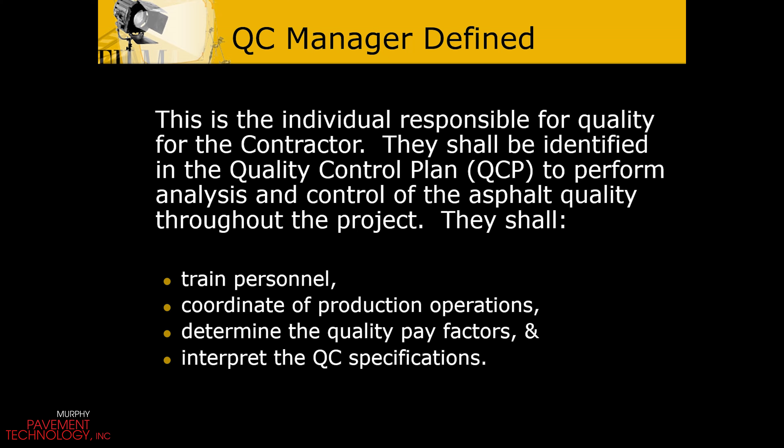They're typically going to be determining pay factors on a project after they get test results, and they'll be coordinating those pay factors with the agency they're working for. And they're always both interpreting quality control specifications as well as helping industry and agencies develop future quality control specifications to help improve asphalt pavements.

Quality pay factors are a reflection of consistency and accuracy. A contractor can produce product with a very narrow range of test results, but if they don't target the correct location, they could fall off and in some cases be below the lower limit or above the upper limit of pay factors. So paying attention to the target—I'll call it a job mix formula, or a contractor's job mix formula—and then the consistency towards that target throughout the sublots.

And then you end up with typically a lot pay factor, and the number of sublots and whatnot that go into a lot vary from state to state, but they're significant. They could be as low as 4 and typically as high as 10 sublots for each lot of material.

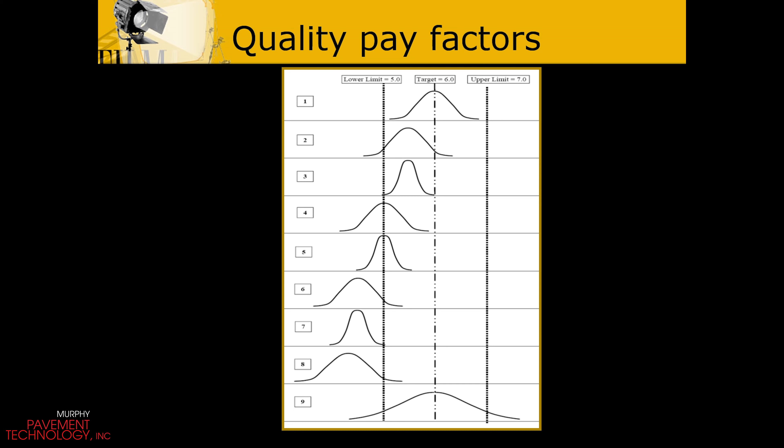So you can see here, this is really not consistent from test 1 through test 9. This is also a graphic that shows you how maybe 9 different contractors actually perform under a quality control or pay within limit specification. So again, typically we want to have a very narrow range of results, and we want to make sure the target is as close to the middle as possible.

Quality control manager's must-do list is always evolving. Planning and communicating are very important. Organizing personnel—what time they should show up, and what activities they should be performing throughout the project.

The quality control manager needs to be intimately involved in input products so that they can anticipate adjustments. We call that controlling the process, and making minor proportioning changes as needed. They need to lead by example. And similar to before, the quality control manager needs to learn how to command respect, not demand respect.

Staffing challenges do exist, especially in the summertime when we have day and night work. So the quality control manager needs to staff accordingly, whether it's with employees from the asphalt producer or by reaching out to local consultants that have the talent pool to supplement on an as-needed basis.

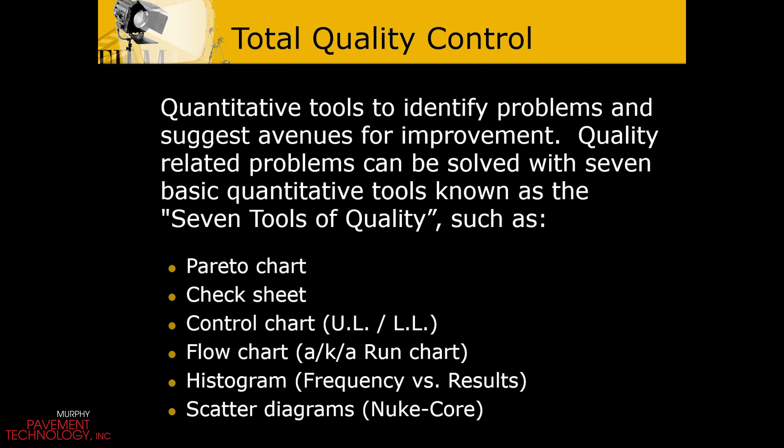One of the tools a QC manager can use, and actually any manufacturing facility can use, is a Pareto chart, named after an Italian economist many years ago, that demonstrates from left to right the amount of defects. The taller the bar graph, the more the defects, ramping all the way down to the least amount of defects, but the sum is going to be 100. In this particular case, you can see—this is just an example.

Lack of action when variability exists is a very common problem in the manufacturing of products. Aggregate variability in some sources can be incredibly high, testing error—whether it's on the contractor side or the agency side—still, unfortunately, a very large portion of our defects in asphalt come from testing variability.

What's going on at the asphalt plant? Is it properly lined out, calibrated, and whatnot? And certainly misinterpretation of specifications can also do it. So the red line that forms essentially runs up to 100% defects. So if you had 100 defects and you summed each of these individually, that's how it works out.

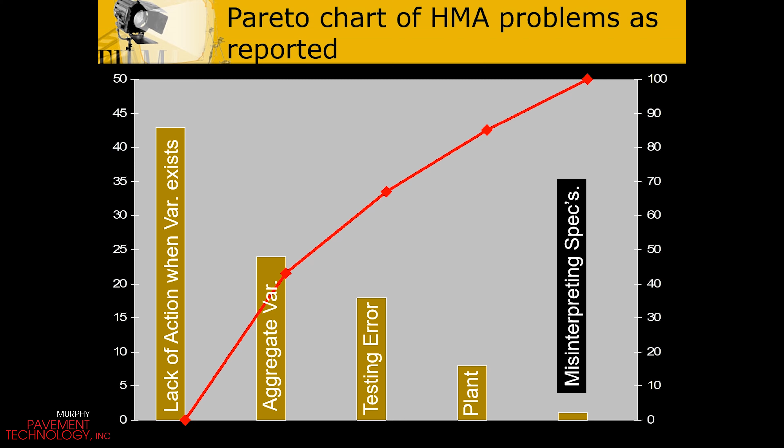And then you need to decide which ones need to be addressed first. Why does lack of action occur so much? What are the ramifications, the penalties, and whatnot? It's a very good tool to use to be successful against a Pareto chart.

The simplest form of getting data into a Pareto chart is a quality control checklist. It could be somewhere on an interstate, and various problems come up. You need to pay attention to how often they occur, and then tag it with who you need to talk to in order to resolve these issues—maybe a foreman, a superintendent, or a plant operator.

Why do we have certain problems? Is it a design issue, gradation breakdown? Is your plant properly set up to do positive dust control? Did you do a mix design that properly anticipated how much dust would be in the mix? Segregation has been a topic I've trained on my entire career, and unfortunately I continue to do so, as it keeps rearing its ugly head for various reasons we'll talk about later.

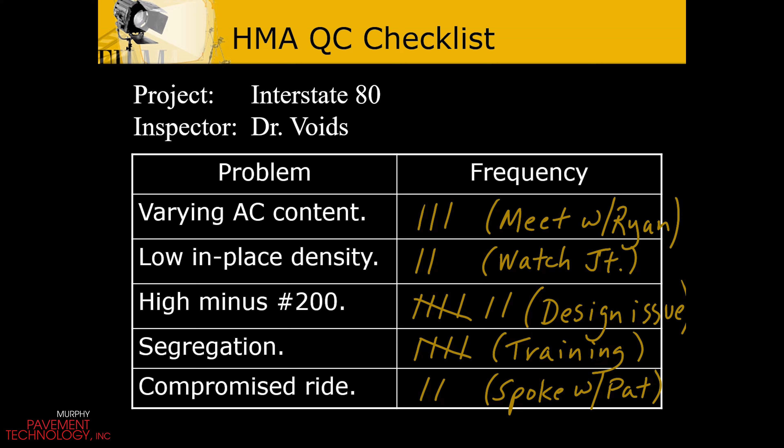And a compromised ride—was the paver properly set up? Did the superintendent set the job up correctly and use two skis when required, or did they elect to use a joint matcher, which causes nothing but problems on a project? We talked about that in the last module. I just want to continue repeating some of the things that remain problems in our industry, so please pay attention to those.

Quality defined from Japan—different individuals came up with commentary on quality, and which one applies to you and what makes you feel that quality. Yeah, that really sounds like why I think quality is important.

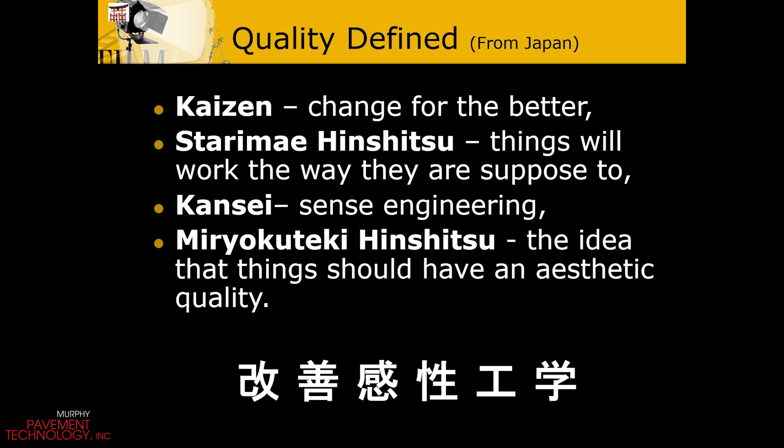The aesthetics could be an issue. It certainly is in commercial parking lots—that's a major part of the quality measure they have. They don't know what asphalt is, and they certainly don't know what gradation is, but they can definitely look and see if your joints don't match and if the texture of the asphalt is smooth or not.

Another quality definition, from TRB Circular 457, which I think is really good, is the degree or grade of excellence of a product—and is the customer satisfied, yes or no, and to what degree? If they're really happy, we call that an A+, and you're going to get paid the maximum amount, which might be 105% in a pay factor.

And then there's the degree to which a product conforms with a requirement—requirements for oil content, strength, voids in the mineral aggregate, Hamburg testing, crack testing. It could be the prettiest, smoothest ride ever and have great density, but if it doesn't have the right ingredients, there might be a penalty. There's an awful lot that goes into this, so I applaud the TRB for putting this definition of quality out there for all of us to follow.

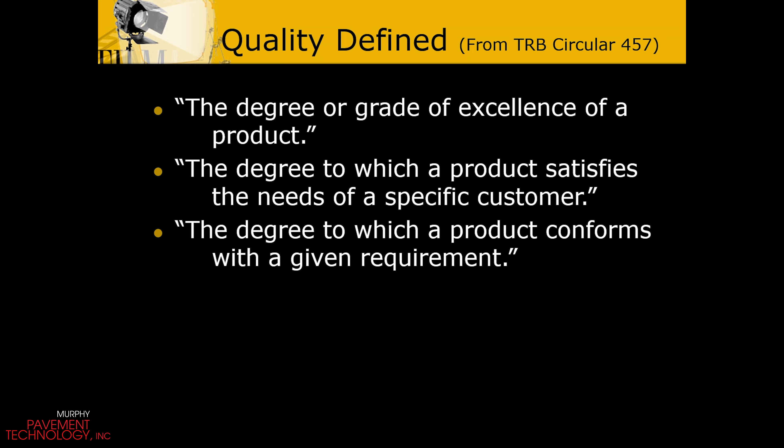I hope you adopt it. I hope you adopt the quality requirements we talked about. Then your job gets even more difficult, because it isn't just one asphalt coming out of a plant—we have transition mixes. That means we might be making asphalt for a local agency, then flop over to an interstate, then back to a commercial job, and vendors come in to pick up asphalt. This is very challenging. Transition mix is probably one of the largest reasons we have failing test results in asphalt, due to a lack of the plant operator paying very close attention to the transition from mix 1 to mix 2.

Probably, again, the number one reason for failure in test results is transition mix.

We have a lot of different asphalts around the world. We could have very low ADTs or very high ADTs—average daily traffic counts. We're going to have a lot of different asphalt mixtures for each type. There might be a big stone or a little stone, a coarse gradation or a fine gradation. Could be a dense graded asphalt, could be a stone matrix asphalt. Lots of different characteristics are required because asphalt is so phenomenally flexible and can be used in so many applications, but you need to make sure you use the right mixture in the right application for success.

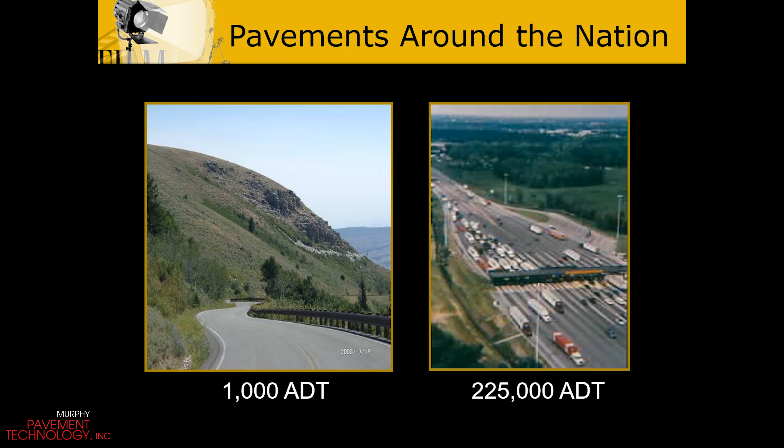We wouldn't want to put a low volume shoulder mix on a mainline truck route in the middle of a city.

So it was a triple whammy in this particular case. It only flushed in one direction because of those two things—that was the day they paved with ingredients a little high on dust and oil. It's also the way out of town, where the trucks were fully loaded, so you could potentially have different characteristics based on the loading of the roadway. I think you all know that.

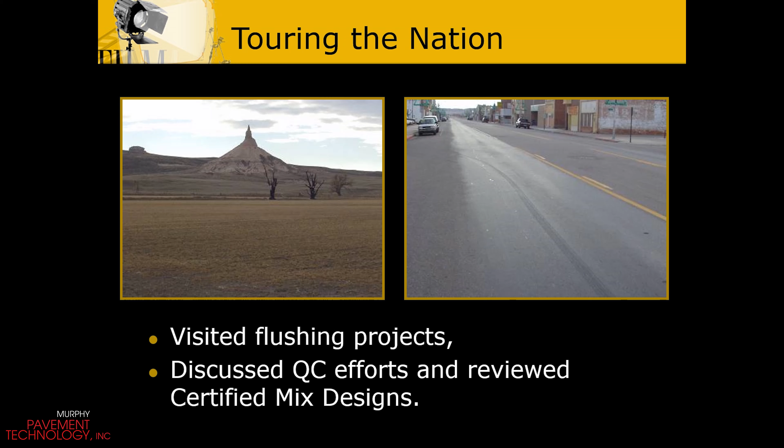So a little more on total quality management. From Deming, learning is not compulsory, but neither is survival. So it's very important for us to adapt to our changing environment, adapt to the specifications we work under.

Most successful asphalt companies are going to be the ones who can figure out how to put all the puzzle pieces together, how to build teamwork in the different silos between crusher operations, asphalt plant production facilities, estimators who bid the job, the paving crews, truck drivers, inspectors, and owners. You need to be profitable, but you have to be compliant. And everybody on the contractor's team needs to understand and pull in the same direction.

Really don't want to be working independent from one another. This is a nice puzzle, how all the pieces fit together and they work together. This will be the most successful company.

What are other things you need to manage to be successful in road building? Innovation, research. You need to continue to research. Hire experts to come in and help you out from time to time. Upper management is crucial. Technology, marketing, it's never ending. There's just a never ending list of items where we can put efforts forth to be more successful in building asphalt pavements.

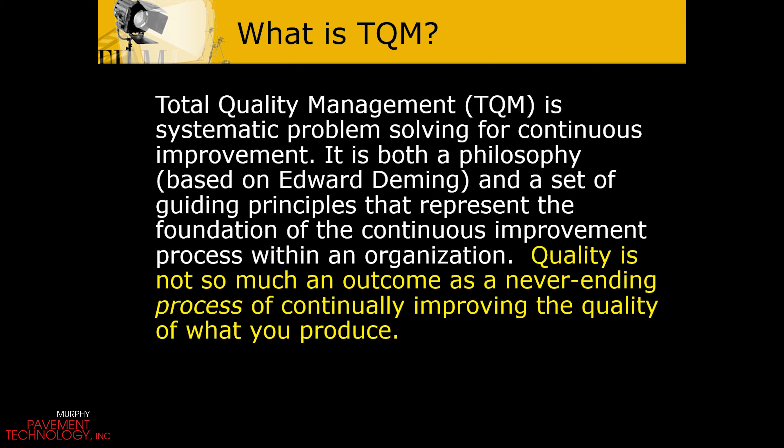One of our daughters, it reminds me of a story of one of our daughters when she was very young in kindergarten, and she was having simply back pain because of the backpacks, and a lot of kids have had these challenges. And so it's a typical example of what they call a fish chart.

So you look at different things: the design of the bag, the school environment, how large are the textbooks, the size of the student, things like that. So this is just as they call a herringbone or a fishbone diagram of a lot of inputs, a lot of variables.

And once you have identified the problem, you need to quantify the problem. Once you've quantified the problem, you need to solve the problem. And I like to call that your IQs. Identify, quantify, and solve.

An overview would be to ensure you do not die from too much data. You need to understand what's relevant information, what's useful. Some organizations present me with stacks upon stacks of data.

Much of it's useless. They don't know what to pay attention to, so they just accumulate everything. When you do that, you're not going to be able to make a good decision. There's just too much information. So you have to really break it down and understand what the most important information you need to do your job is. Everybody, everywhere, every organization has processing errors and shortcomings.

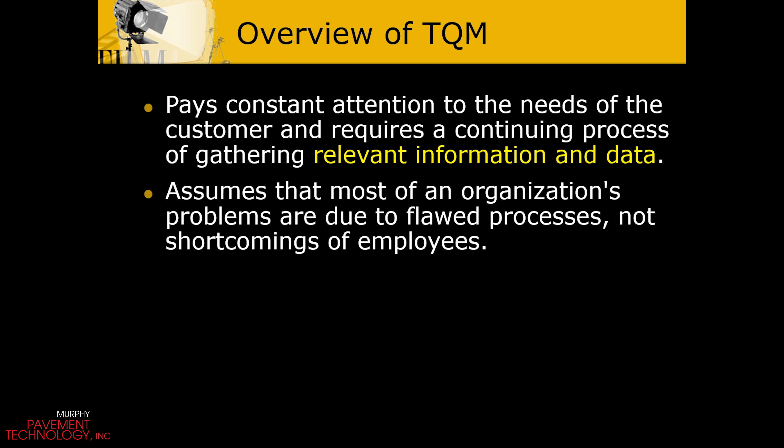Juran defines quality as fitness for use. All right, that's fine. Deming said, hey, quality should be aimed at the needs of the customer, present and future. Either definition's fine. The customer decides what they want, what quality they want, what they're willing to pay, and then they don't participate in the process that creates the product.

That's very similar for our asphalt industry. Specifications are written. They're going to require certain volumetric measures, certain strength measures, stripping measures, cracking measures, and then the contractor will put a mix design together with the ingredients that are allowed by the contract documents, and then they realize there might be some variability. So they might build a little shock absorber into their mix design, so if there's any variability, all of their test results pass. That's going to be the definition of an excellent contractor.

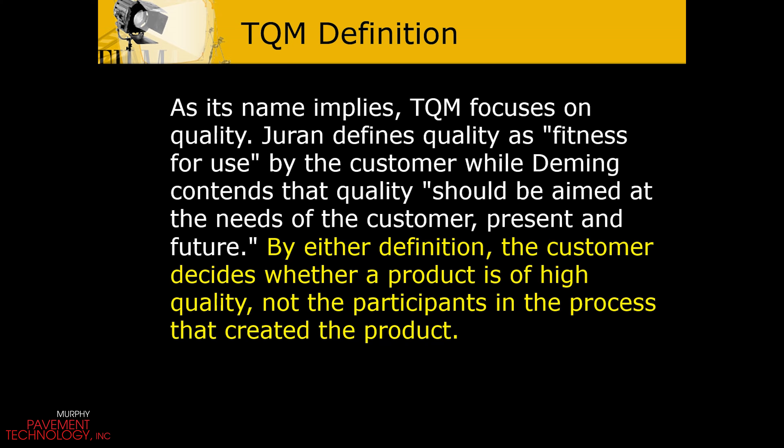Excellent contractors can only be known as excellent contractors if they have a very good support team, and in particular, the quality control manager leading that support team. We do need to have buy-in by the plant operators as well. We need to continue to educate and assist our contractors, our construction part of our contracting arm, to do a good job in smoothness and in density.

So TQM is based on the idea that those feeling the impact of the decision should be involved in making it, okay? Those feeling the impact of the decision should be involved in making it. So empowering employees is going to lead to the greatest amount of success. All right, it's a very, very profound principle, and that means sharing knowledge, sharing data, and don't hold back things.

I think there's a delineation between people who are what we call inspectors, samplers, and testers, and then the next level of somebody who can analyze the data, adjust, and anticipate what's going to happen. I honestly believe some people spend their entire career in the first level, and then they're asked to become quality control managers. Those are quality control managers that fail. Those who really understand how to analyze, adjust, and anticipate will be the most successful quality control managers.

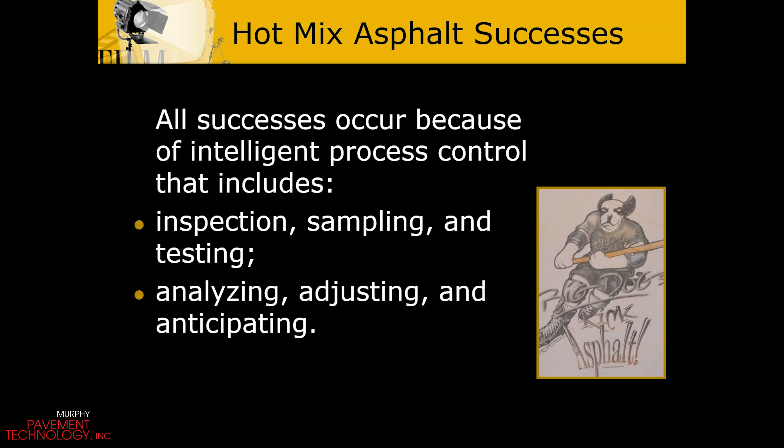So back to inspection. Inspection begins at all of the facilities, typically the aggregate quarry, works onto the asphalt plant. Then we grab samples from the field as well. We need to look at stockpile. We look at equipment maintenance needs. Need to make sure that we're not introducing variability that does not need to be introduced.

We need to be on top of these things. We need to continue to draw and do our job, draw from others' experience from the start of the season to the end, because these things can unfortunately occur at any given time if we're not on top of our game.

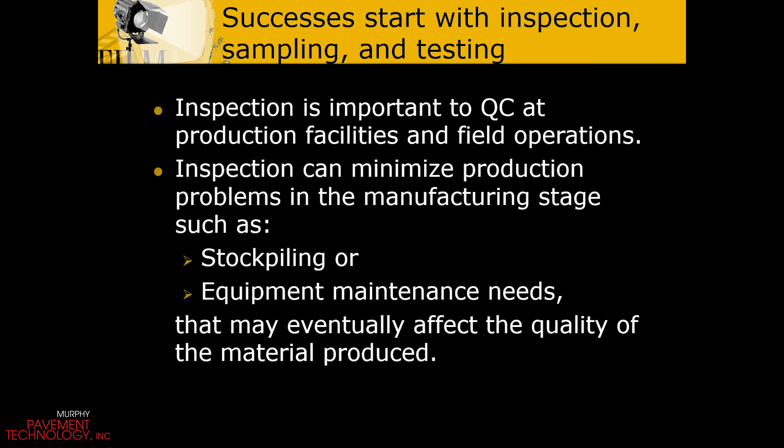Know where to sample, know how to sample, understand aggregate's specific gravities. The color of an aggregate can change, and so will the gravities. Understand that reclaimed asphalt pavement needs to be processed and handled appropriately.

Understand that when you put a mix design together, you should introduce breakdown into the mix design, because all of the aggregates will break down as they travel through the drum. If you introduce a little bit of breakdown, it could come from the bag house. Introduce that. That's going to help make you incredibly successful once you go into production.

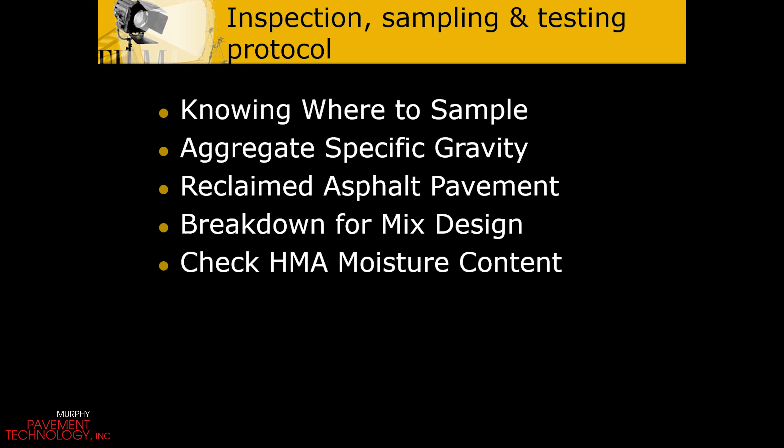Let's keep after our moisture contents, both in the aggregate stockpiles, but also at the point of discharge from the asphalt plant itself, because we should probably not have more than 0.3% moisture in our asphalt mix at the point where the asphalt comes out of the drum. If you have excess moisture, you're going to have asphalt cooling too quickly, and that's going to present a problem.

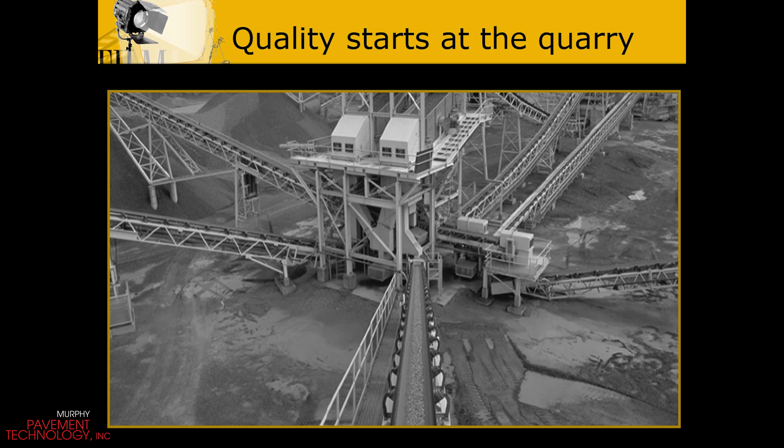This is just a picture, I believe, from NHI, just showing a very large quarry and a lot of different products that can be manufactured. So we do have to pay attention to the production rates and gradations of the products as they're built into the stockpiles.

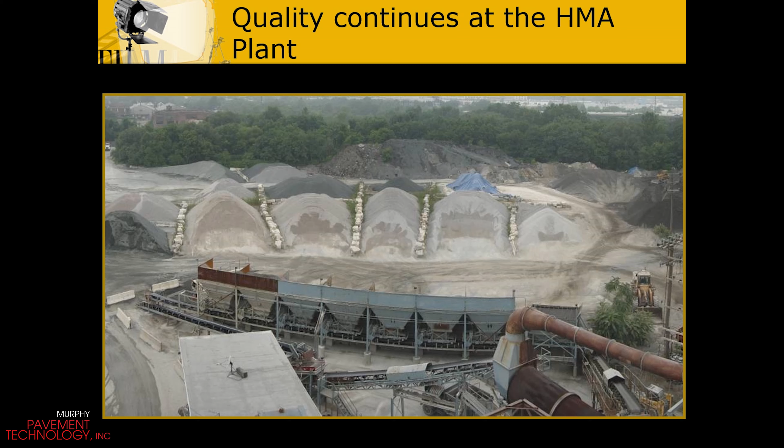Storage at the asphalt plant is very important. This is an asphalt plant that shows nice division between the different products, and certain products are also tarped to keep them dry as needed for good production. It would also be a place where you would grab the gradations, test for gradations of the aggregate products and moistures as well, the different stockpiles.

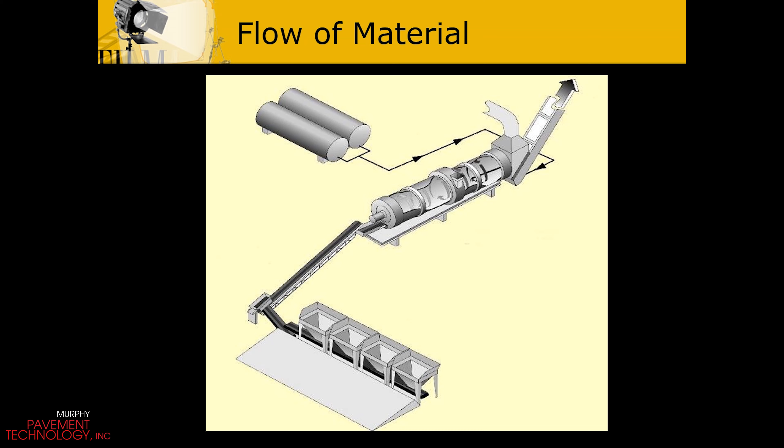It's early morning for a quality control technician, that's for sure. It's that typical sketch of the flow of material at an asphalt plant from the cold feed all the way through the drum.

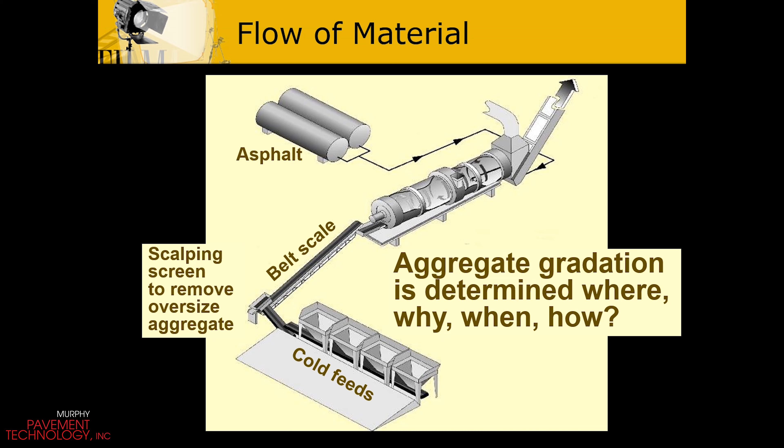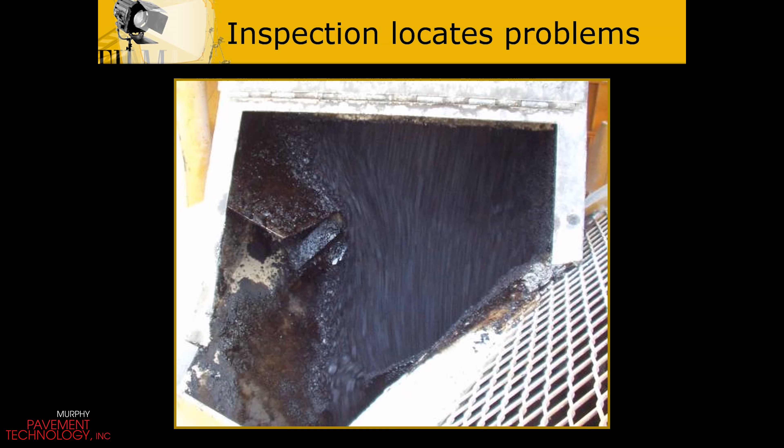Again, do you test it behind a paver, or do you grab a sample out of the truck and then shuttle the material back to the lab as quickly as possible? We want to perform our asphalt contents and gradations. We want to do volumetric testing with our maximum gravities and bulk specific gravities.

Sometimes we'll do Hamburg testing, sometimes crack testing. An awful lot of tests go into qualifying product, and when they're consistent, the material is excellent, and if it meets the proper specification level, it's going to last a good long time. Remember, we're trying to do process control and build asphalt that's going to last at least 20 years with appropriate maintenance techniques.

So we're going to look again at the target, the standard deviation of the product, and there's different things that come into it. Some of you have heard the phrase Six Sigma, which talks about standard deviations below and above the mean that we measure for producing asphalt. And we're always trying to improve upon that.

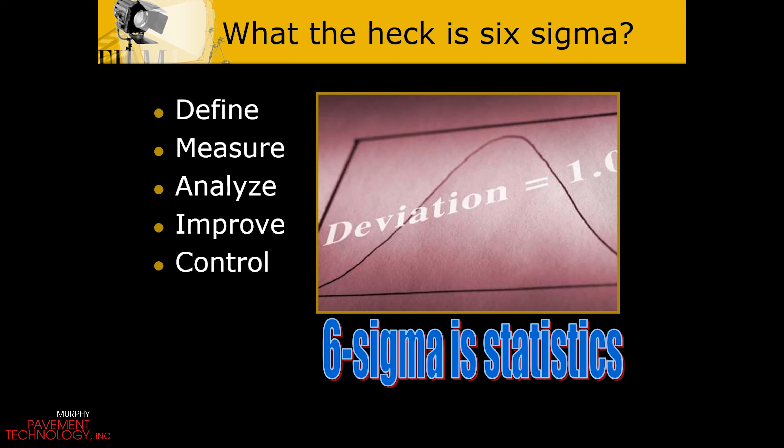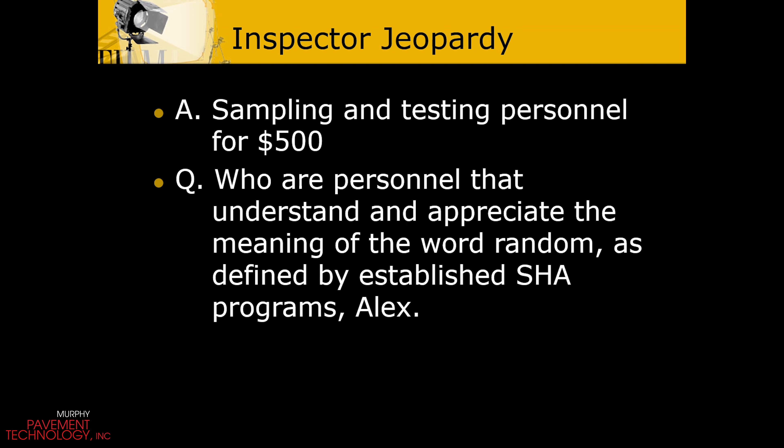Random testing just means we're not going to say, hey, I'm going to take a sample every day at 7. We figure out how much material we're going to produce in a day, divide it into sublots, and randomly generate numbers that tell us what truckload to grab and what offset to grab it from. You might know it as station and offset. Some agencies still allow you to grab samples during production at the asphalt plant or out of a truck, so just follow your agency specification for grabbing samples.

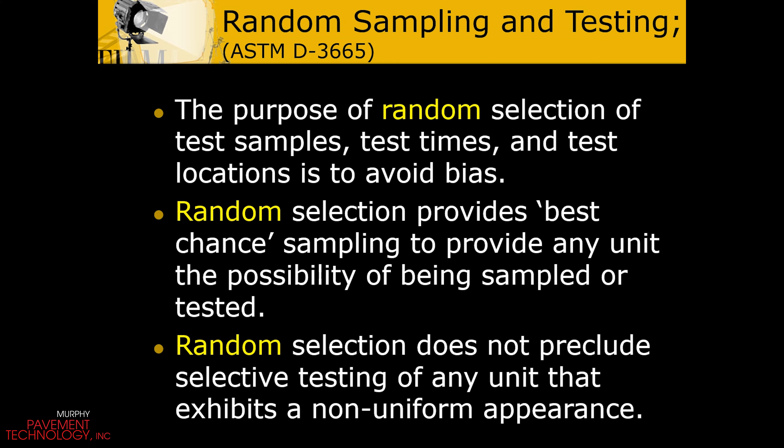It doesn't preclude us from grabbing biased samples. That's to help us define what went wrong. But random is really used to accept material in large amounts. So that's why it's important to understand what random is and its value, and understand what a biased test is and its value.

We need to focus on quality and prevention of problems and do our best not to just live a reactive life. A good mix design is going to go a long way to mitigate variability that's inherent and keep a test result from being determined or called defective.

The contractor needs to know their ability to produce product consistently. That is exactly how you're going to be successful. When you're successful and get awards, the marketing and the customers just flow. That's another really good reason for getting contractor quality construction project awards. Many states do it—I've been to the Indiana Asphalt Pavement Association's meeting several times, and they give out dozens of awards for contractors who do excellent work. These are definitely your calling cards for future work. So please participate as best you can in applauding your competition, but also challenging your own organization to a higher level to be successful.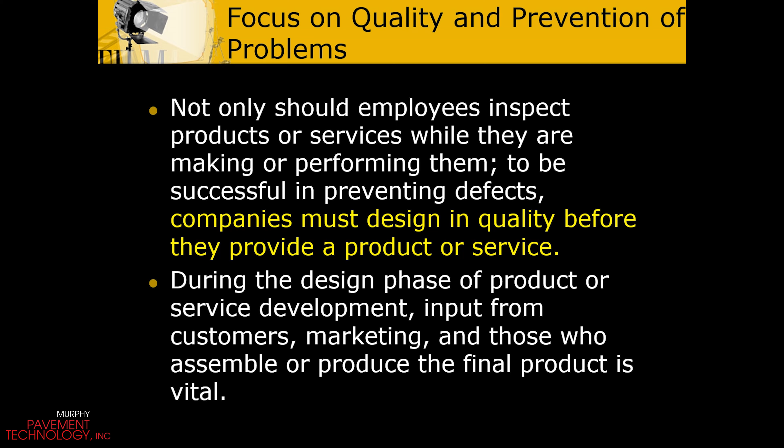Major elements in the solving and prevention cycle: yes, we need information, but it needs to be useful information. We have to analyze before we take action, and we have to understand the cause and effect of things.

If the dust is 1% high, voids in the mineral aggregate will be 1% low, and in that case air voids is also 1% low. So we have to understand we're always going to adjust our voids in the mineral aggregate with aggregate gradation, particle shape, and surface texture. We can adjust voids with asphalt content, but first we want to get our VMA in order, and then everything works itself out.

Use brainstorming—get multiple people together if you don't know the answer. Try to reach back to people who've had experience in the past, and maybe it's the same answer that solves it for the future. We always want to be evaluating so that we're successful.

Do your best not to get complacent when everything's running along smooth and true. It doesn't mean you should give up on auditing yourself, auditing your employees, and checking all of your equipment. That's how you stay fine-tuned.

Establish, display, and use control charts. They're wonderful—put it up on the wall, let everybody see it. It's a proud moment, or it's not a proud moment. Plain and simple, you just can't hide it.

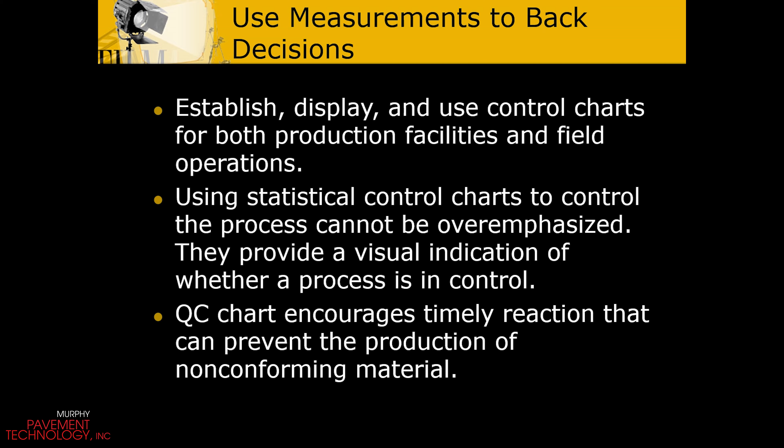Trend towards the target almost in every case. Understand you have a maximum tolerance above and below. Hammer on your suppliers all you want.

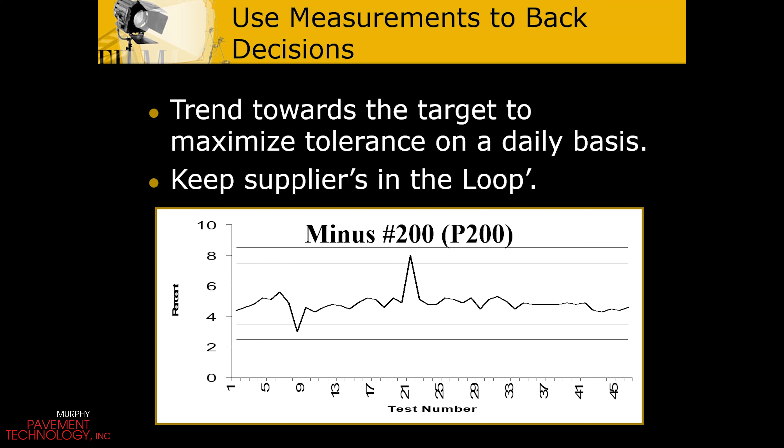You cast it aside, you grab another sample, and you test again. But there's always cause and effects. If the dust had skyrocketed and the VMA collapsed and your compacted gyratory specimens became greasy, I'm fairly certain the asphalt was shoving around under the rollers as well in the field, and you would have heard about it from multiple people. So every cause and effect, they work together extremely well, and you should be aware of them. That's what I call good measurement, reasonable measurement, and understanding the product best.

Use run charts for individual tests and use run charts for averages, typically 4 or 5. That'll demonstrate what you're doing. Are you reacting? Is there a trend upward or a trend downward?

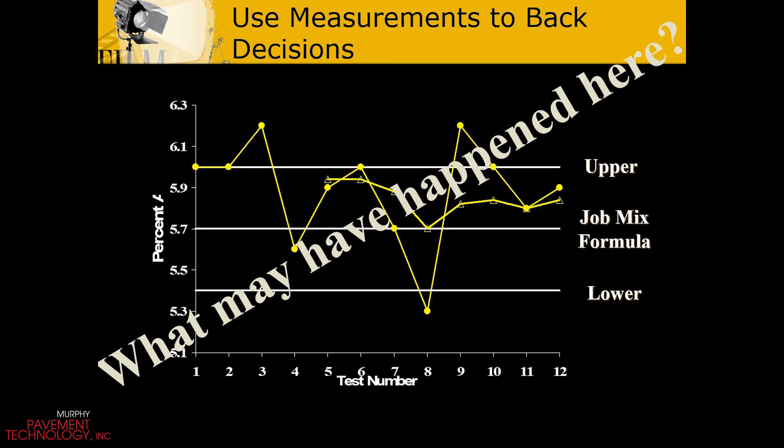On the individual tests here, this is not a good example of a system that's in control. Measures go high, measures go low, and then when you take 2 or 3 of them, they have a tendency to average themselves out. If you look at test number 8 and test number 9, old specifications would have said, take 8 and take 9, add them together, divide by 2, and if you did that, it'd be perfect. When the reality is we have 2 test results that are significantly out of specification, one on the lower and one on the upper.

So do pay attention to that data. It needs to make sense. Statistics are a wonderful thing that help decision makers make good decisions. It helps to avoid knee-jerk reactions. It helps to understand systematic factors and how well we can actually perform our job. If we don't pay attention to statistics, it'll significantly affect our product and service quality. They're all very interrelated and intertwined.

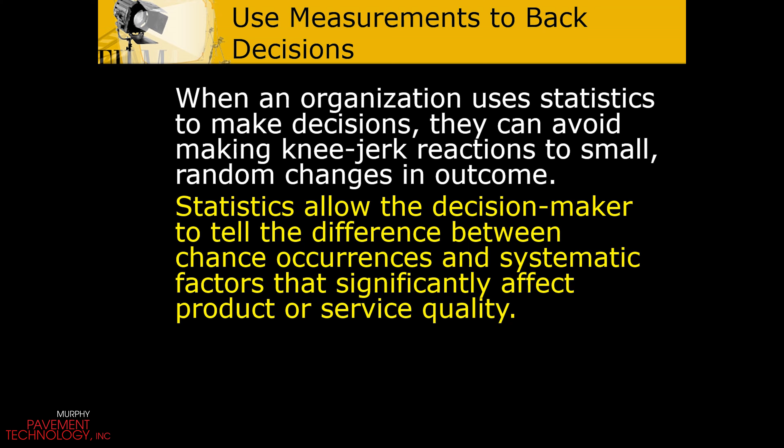So spend a little time on your specification. Make sure you understand the pay factors and the statistical process control required.

Organizational realities and individual realities have to be matched and mated together. That's where quality management realities collide, and we want them both to be extremely high, and we want you to be extremely successful.

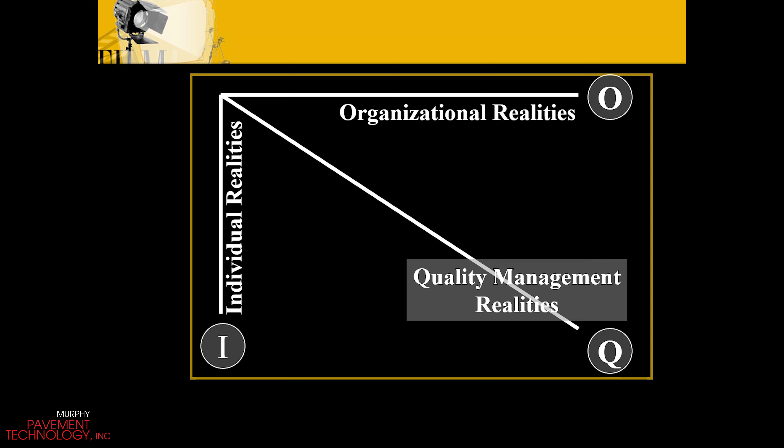This doesn't come free. Human resources has to continue to help develop the quality control organization, the entire organization, but since we're talking about quality control managers, in particular the QC manager and their staff, organizational development, working with human resources, is going to give you the best team possible.

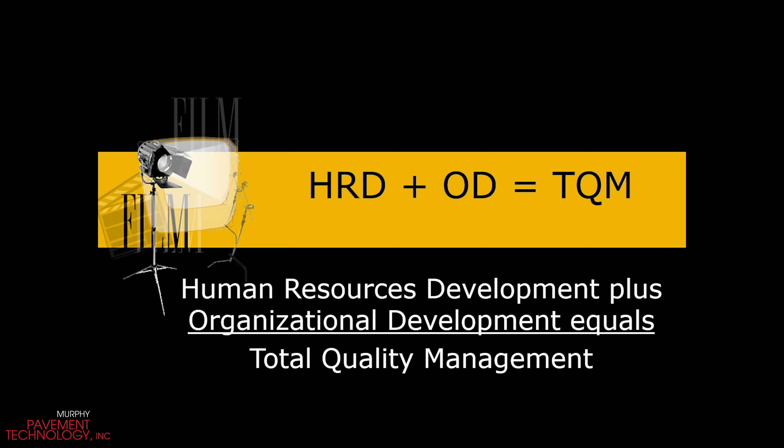Relationships between causes of low customer satisfaction are many, and many of them are intertwined. You could give the customer a lousy mix and an incredibly low price, and for a period of time they might enjoy it, but the performance is going to be terrible. And those who install that asphalt are going to start losing customer and client base because the asphalt might segregate or the asphalt might ravel or crack prematurely.

They want a product that can get installed. They want you to be able to balance high price and low price. They want the right price, and they want it to last a good long time.

State agencies do an excellent job on specifying and demanding a mixture that's going to perform for many years. They'll use polymers to help asphalt out. They'll make sure there's a very good mix design and rugged performance tests such as Hamburg testing or some type of crack testing. They pay a little more, but they have to because the roads carry so much traffic. And it's the lifeblood of our society. We want those pavements to last a good long time.

Big box stores are starting to understand the value of quality control and quality assurance, and they're starting to gravitate away from less is better. They're definitely gravitating more towards higher price, but also higher quality. It's what they want, it's what they spec, it's what you should deliver.

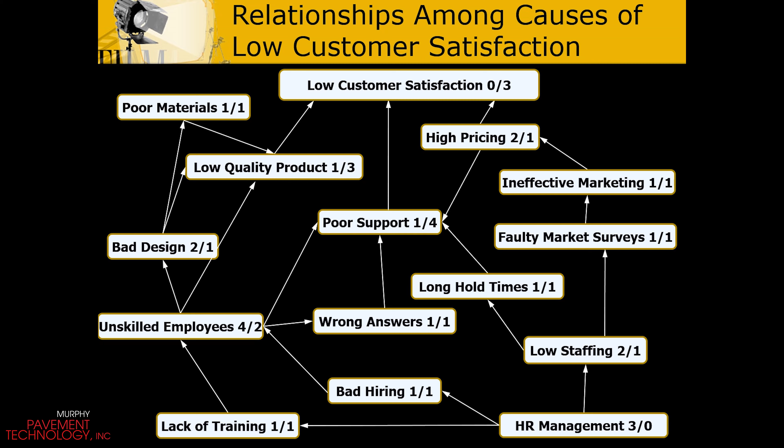Improving customer satisfaction, again, comes to good quality product, competitive prices, and obviously they love support. A lot of items go into helping a contractor be at the top of their game.

You can't reduce prices if you don't have increased market share. You can't increase market share if you have a product that isn't good. And the only way to ensure your product's good is to have quality control testing going on. There's a cost to that. The proper staff, the proper training, making the proper decisions.

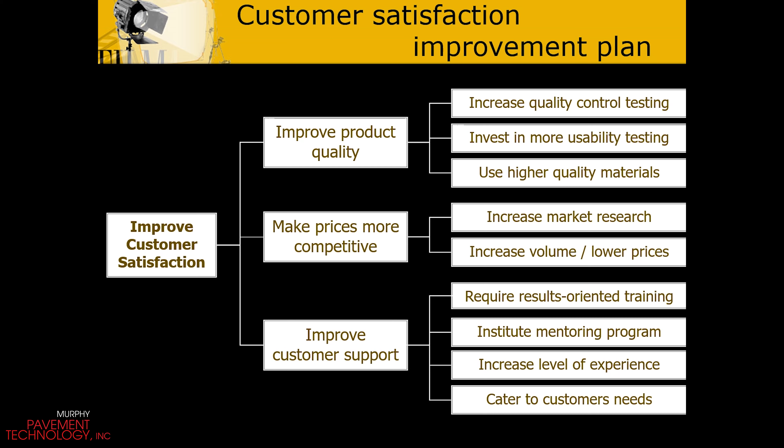And then throughout the whole thing, we have to really improve our customer support. We have to explain to them the pros and cons of quality control and the product that they use for their facility. Again, quality control managers control this part of the improvement plan 100% in my opinion, but they need upper management support to hire and train the correct employees for the job.

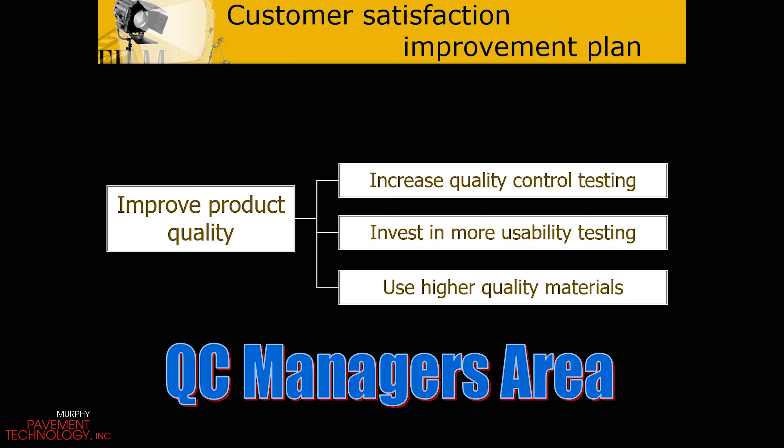Balancing everything is the quality control manager's job. They need to understand how much the facility can produce, what products they're producing on any day. They need to provide service to the paving crew by watching installation practices for both smoothness and density.

They have to understand trucks need to be of high enough quality. They need to be tarped. They need to be clean, smooth beds. The quality control manager is going to be walking the yard a lot, looking at stockpiles, looking at equipment, looking at manpower and how they're doing their job out on the roadway.

A good quality control manager is almost never in the laboratory, but they're trusting their number one technician to do the sampling, splitting, and testing of the asphalt accordingly. The quality control manager has to be available at all times.

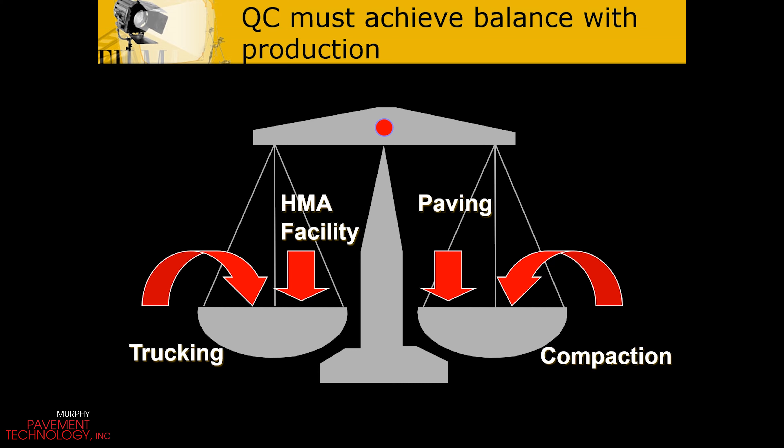The quality control manager needs to be mature, available, and concise. They need to direct people on what is going right and what is going wrong. They need to insist upon consistency. They need to watch out for segregation or using the wrong product.

A quality control manager is always going to dialogue with both the estimator and the owner, and know that it takes more than three weeks to get a mix design done in today's environment.

So pay attention to what you're crushing. Keep it consistent for the mix design, and ensure that you include a bit of breakdown for the material in the mix design phase. And for goodness sakes, watch out for designing a coarse gap-graded mix that is prone to segregate. A much smoother S-shaped curve is really what's desired.

In general, a good design is going to have a gradation that falls within 10%, maybe 8%, of the primary control sieve when the primary control sieve is on the maximum density line. The tolerances allowed by ASTM and AASHTO are too wide to be successful, so don't go to the highest and lowest points. They will get you in trouble, and they do increase testing variability.

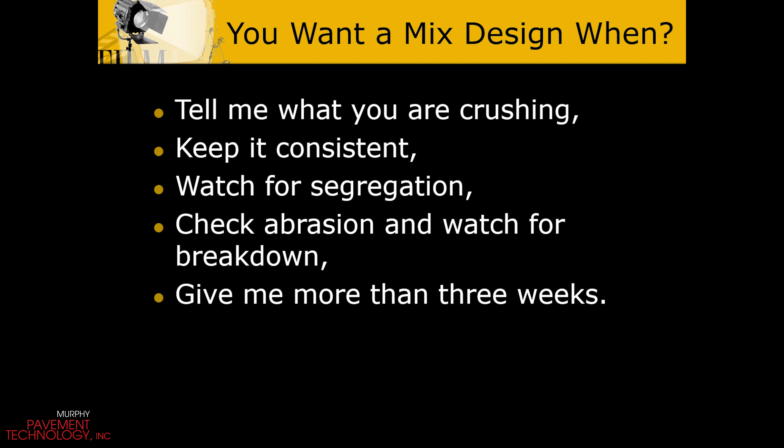A good contractor quality control manager is going to know that. A good contractor quality control manager is going to take it upon themselves to be trained in mix design. The Asphalt Institute has updated MS2 asphalt mix design methods. They do mix design training around the nation, as do other people.

A good quality control manager who hasn't been through a quality control mix design course by a good instructor, well, they're a good quality control manager. And I always like to say, why let good get in the way of being great?

So I'm going to applaud those quality control managers who have been through a mix design school, and I'm definitely going to applaud those who decide to go through again, just as a refresher. And finally, the best quality control manager is going to teach their employees good asphalt mix design techniques, review their work, coach them, and encourage them to do a good job.

The winner of quality control, the winner of my soon-to-roll-out Lab Olympics, is going to be an individual who knows how to analyze, adjust, and anticipate what's going on in the yard, what's going on in the field, and how it all ties back to the mix design that they built prior to the project beginning.

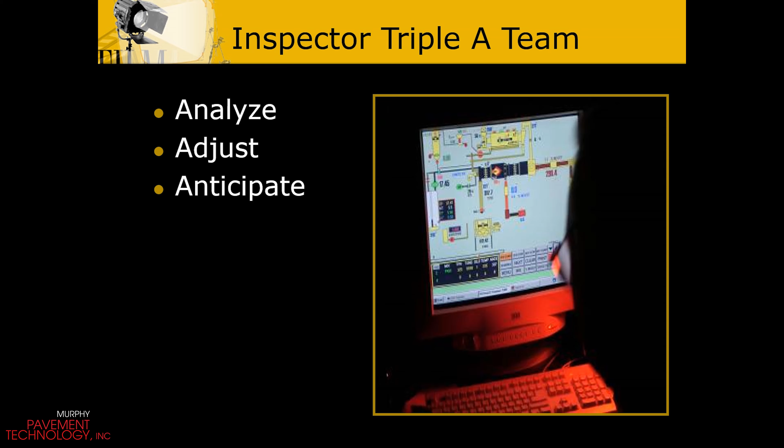And good load-out techniques, they don't come easy. Good high-lift operators are going to do a wonderful job for you if they know what they're doing. Sometimes it's just a little bit of training that they require.

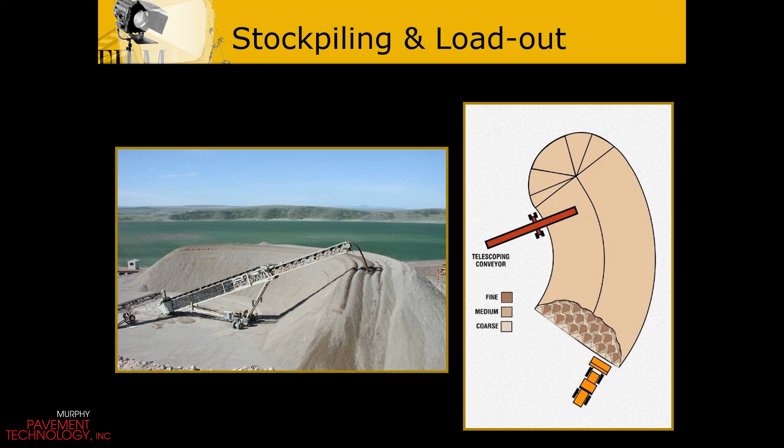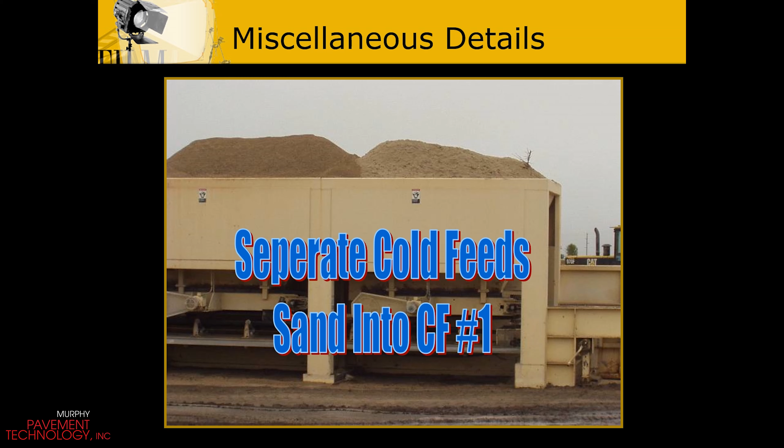The quality control manager can teach the plant personnel. This is a perfect example of missing dividers where product is contaminating from cold feed 1 to cold feed 2. Cold feed 1 even looks like it has a Christmas tree in it. It's just very sloppy and really should not occur. The quality control manager needs to be on top of these items.

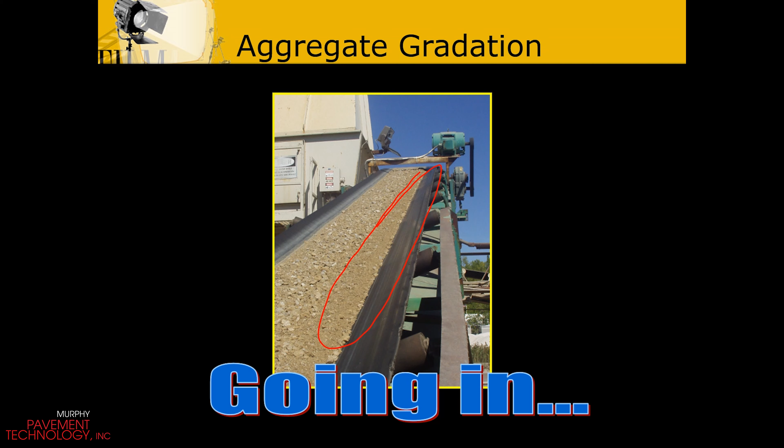Visually, you can all look at this and say, yeah, that's aggregate, that's coarse and fine aggregate going into a drum. But pay closer attention and you'll see the material is actually segregated. It's fine on this side, shown in red, and coarser on this side, shown in blue. That's an introduction of segregation into the drum, which will compromise your heating and drying of the coarse and fine aggregate particles. That will compromise the output.

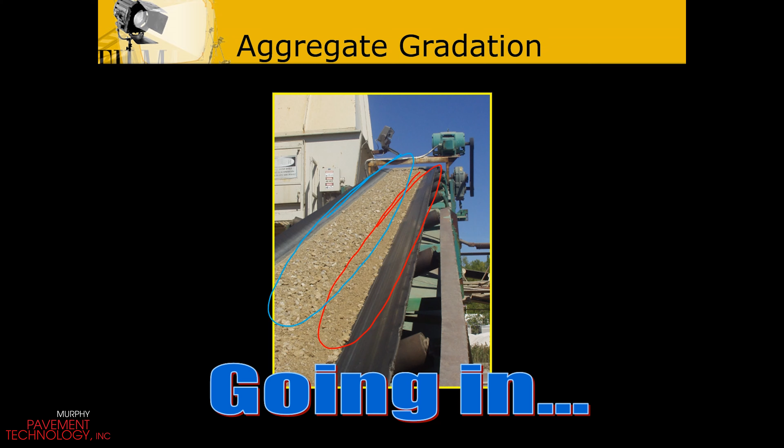So we want to do our best to look at the aggregate flow all the way through the asphalt production facility, and have a pre-pave meeting. We want to look at the equipment, make sure it's properly set up. Make sure we have auger extensions in, tunnel extensions. Make sure the vibrating screed is working.

Again, the acceptance test strip is a wonderful time to develop a growth curve to determine how fast you can actually pave. The quality control manager needs to be involved in the pre-pave meeting 100% of the time.

Some miscellaneous details: pay attention to how you overlap your joints. This was a test strip where the overlapping of the joint was crushing stone. Fortunately it was on a lower lift, not the surface course. I think most of you would know this is unacceptable work.

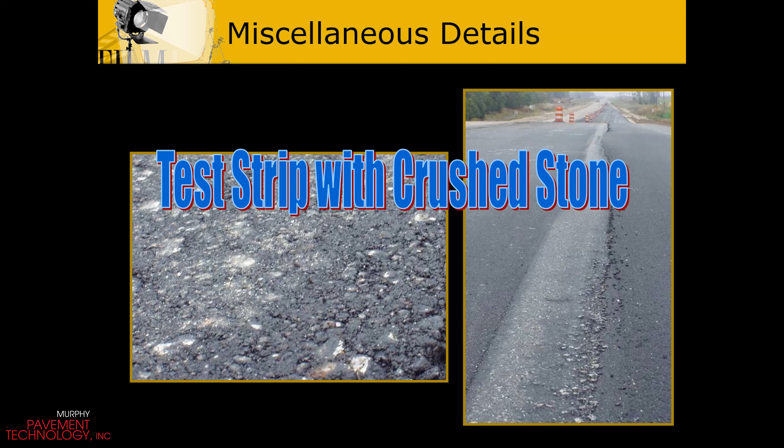Pay attention to how trucks empty. Look at the asphalt in the hoppers. Look at the asphalt out of a belly dump. Clearly you can see the coarse material and the fine material are not together here. We call that a rock pocket. It's most certainly going to show up out on the road as low density and a compromised ride.

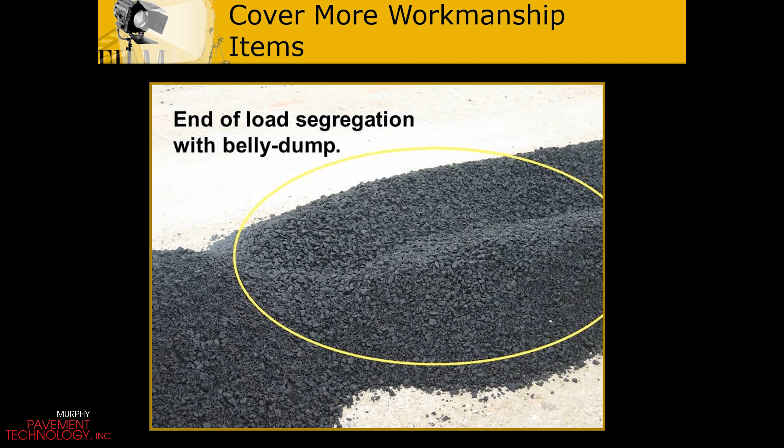Quality control managers at asphalt plants and laboratories sometimes aren't 100% in tune with how asphalt plants work. They need to know how asphalt plants work, how all of the equipment works—rollers, pavers, and trucks. They need to work extremely well with the superintendents of construction to help them do the best they can on their projects.

So again, our summary is to make sure we have good technicians who are properly trained to inspect, sample, and test the asphalt. Quality control managers need to know how to analyze, adjust, and anticipate problems. But altogether, it really takes a lot of teamwork to be successful. A quality control manager is really only as strong as the organization allows them to be, and only as good as they challenge themselves to be.

Different producers have different products. Producer 1 has the higher quality because it lasts longer, plain and simple. Which part of this curve do you want to be on? This is why most agencies pay contractors according to their process control and whether it's excellent, good, fair, or poor. In some cases, if it's poor enough, not only would there be a pay deduct, but they might actually have you remove and replace the asphalt.

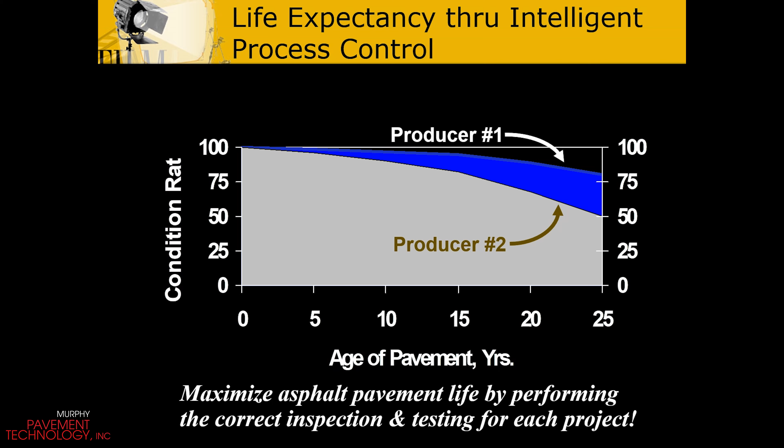It's going to come from training. It's going to come from experience. It's going to come from a good quality control manager who knows how to reach out, ask proper questions of people within their organization, and ask questions of people in industry who are their friends at the meetings. We need to tie all parts of an organization together, and that really is a very difficult job. It's the quality control manager's job to do it. The most successful company is going to have an excellent quality control manager.